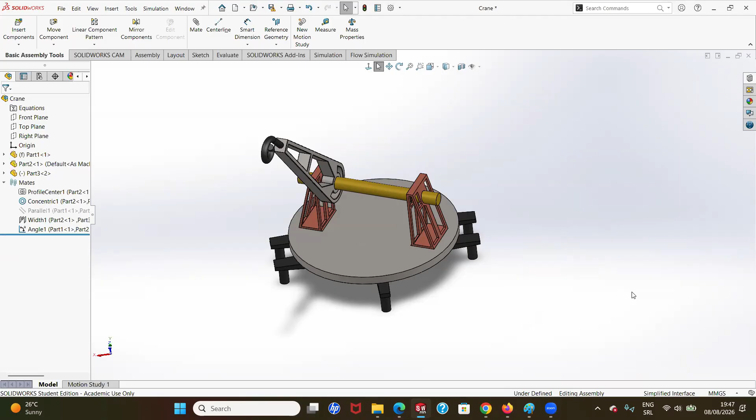In this video, we're going to show two approaches to build this assembly. We're going to show how beginners build this assembly, and then we're going to show how professionals build this assembly. So we have a few parts here. The first part is this one here, support.

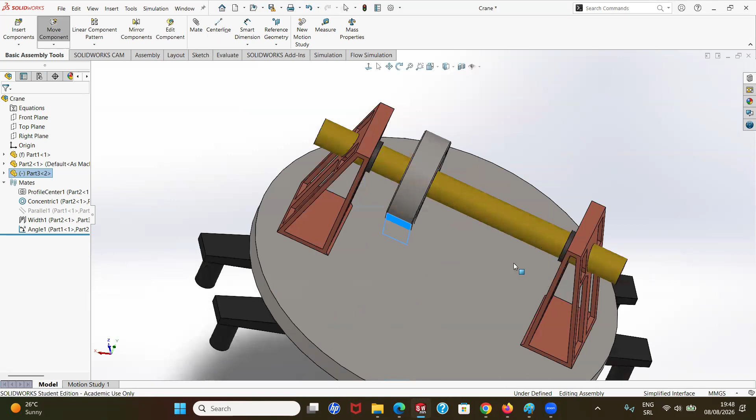Then we have to put this part. This one here, we have to fix this. We have an angle here, 30 degrees. And then we have to put this part here, and this has to rotate. It has to go from this side here to this side here. So let's start and let's show how beginners would build this assembly.

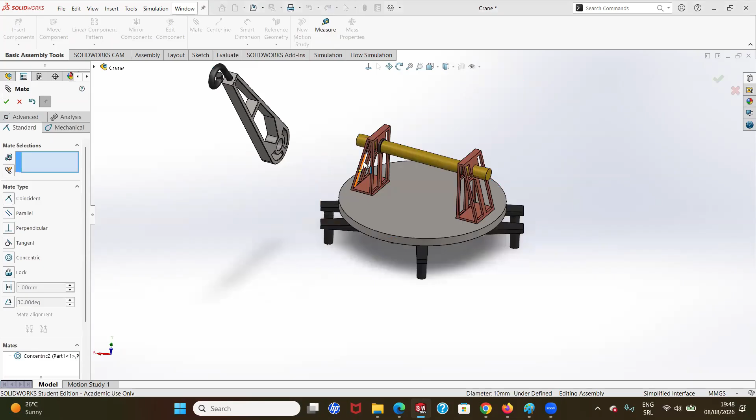So as a beginner, we would go here to the mate, and the first thing that we would do, we would create a concentric mate between this one here and this hole here. Let's click OK. But still, we can move this up and down, right? So then what we would do, we would go here, we would choose this face, and we would choose this face here, and now here we have coincident.

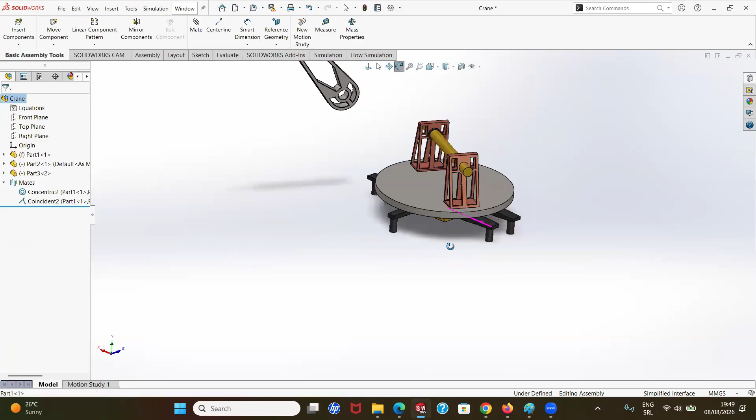So that's the first step. So for now we have two mates, concentric and coincident. The second thing, we would define an angle here between this face and this face here, 30 degrees. So we would go to mate, we would go here, and we would select this face and this face here.

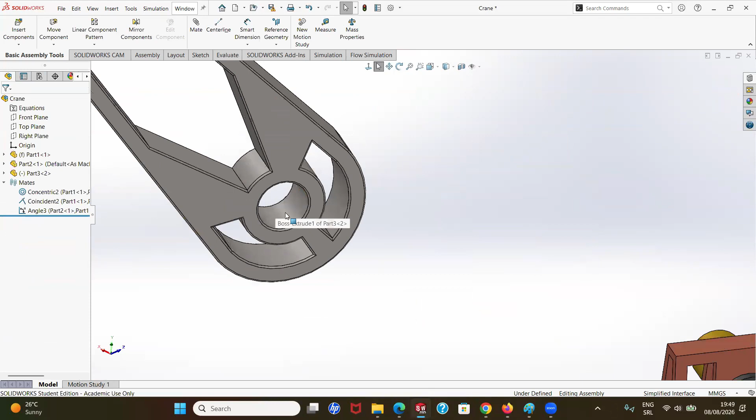Let's click OK. Then the next thing, we would define a concentric relation between this one here and this one here. Let's click OK. So now we have this, but we can move this along this axis. We have to set up limits. So the first limit is this, and the second limit is this one here.

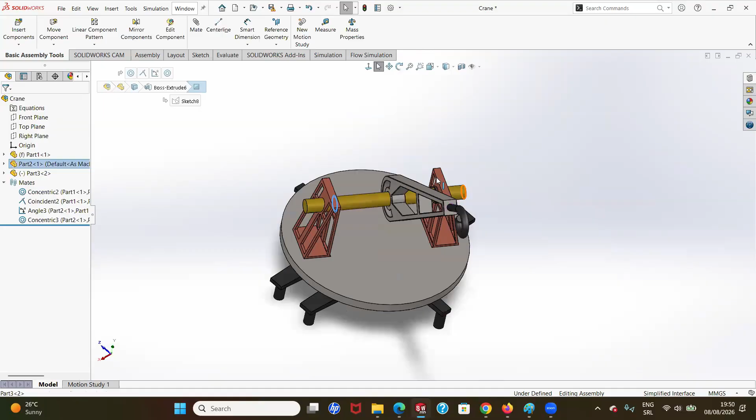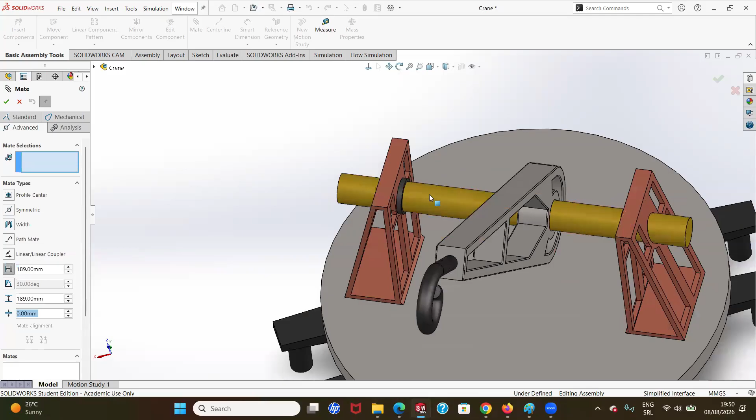So we're going to go here to the mate. Now we have to go here to the advanced mates, and we can go here with length, minimum, which is going to be 0, and maximum 189, like this. So here we have 0, and we're going to select this face, and we're going to select this face here. Let's click OK. Now let's try to slide this. You can see you can go from this limit to this limit here.

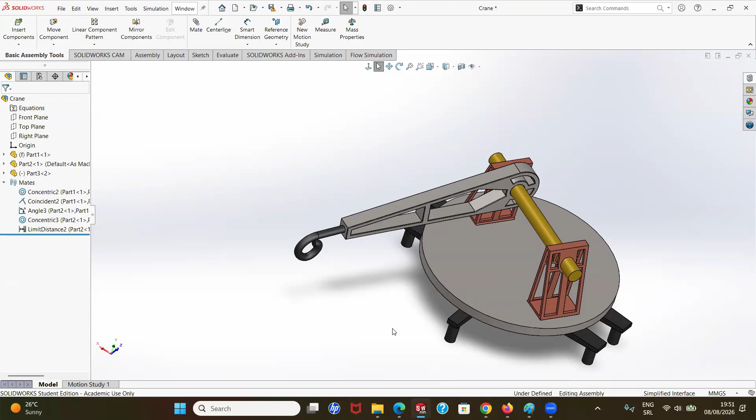Now, this is one way how you can do it, and how most of the beginners would do, but there is a faster way. Some of the mates we're going to use are the same, but we're going to also use two mates that will save you more time and make it much easier for you. Now, the faster way is this. We go here to the mate, and instead of using two mates, coincident and concentric, we're going to go here to the advanced, and we're going to use here profile center.

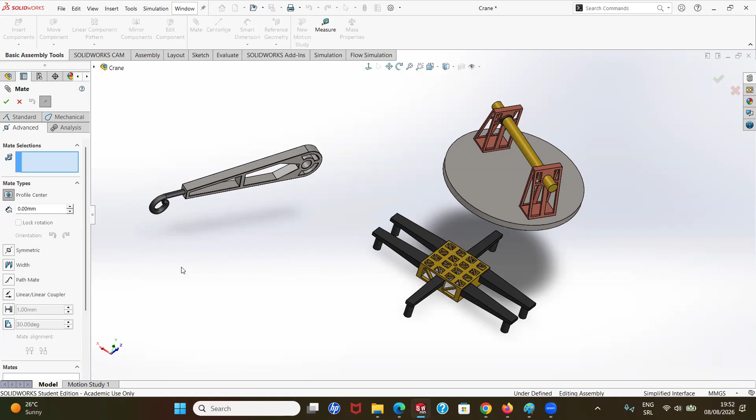So when you have symmetrical parts, you can use this profile center, for example, and we can select this face here, and we can select this face here, and automatically this will be coincident and concentric. So this is profile center. Let's click OK. And now we can rotate this, right?

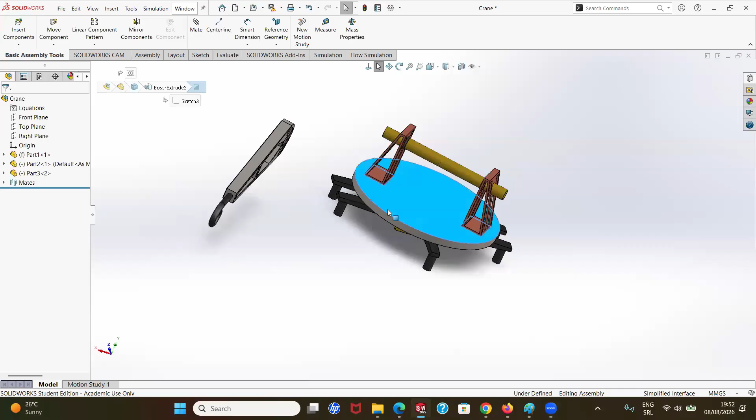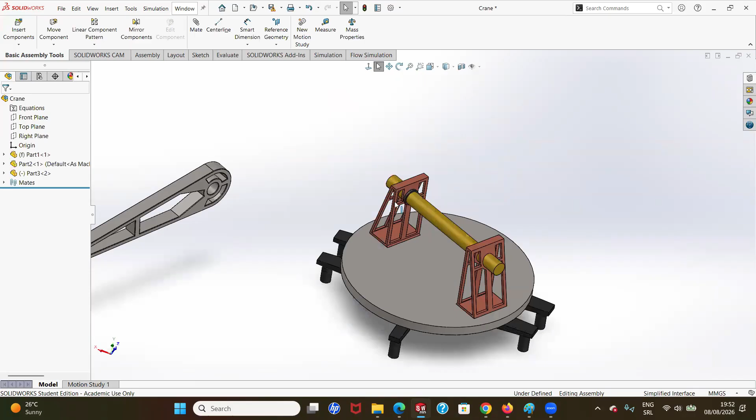Now the second mate is the same. We're going to define an angle here. So we're going to go to the mates, and we're going to go here with an angle. We're going to select this face and this face here. So this is 30 degrees. And also the next mate is the same, which is concentric. So we're going to go to the mate, and we're going to select this one here and this one here. Let's click OK. So we can now move this.

Now we have to put limits. Now we showed the first way how we can put limits. Now the disadvantage of that approach that we showed before is that we have to define values, right? So we have to define a minimum value. We have to define a maximum value. So we have to measure what is the maximum value. So there is a faster way how you can do this.

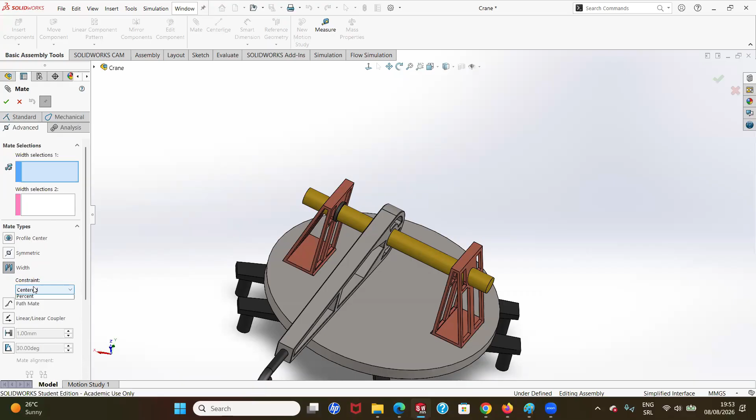So let's go here to the mate. Let's go here to the advanced, and we're going to use here width, okay? And also here for the constraint, we're going to select free. So first we have to define width selection 1, which is going to be this face and this face of this part. Then we have width selection 2, which are our limits, right? It's going to be this face, and it's going to be this face here. And this is it. We can click OK.

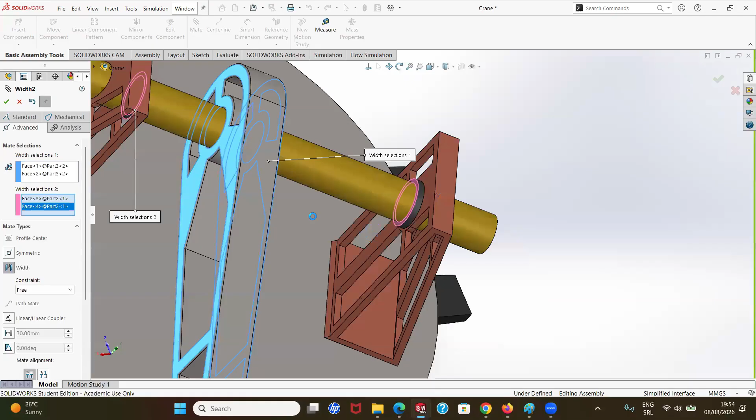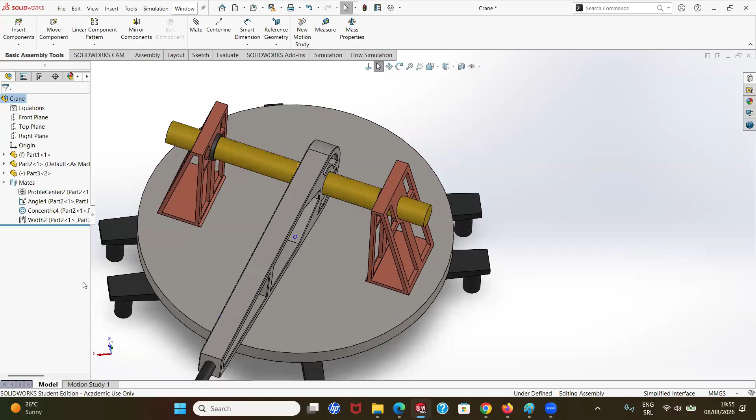And now if we try to move this, we can see we go here from this side to this side here. So this way we don't have to measure what is the maximum distance. And this way you can save a lot of time. Now, when we look at the mates, we only use one mate less, but also we save a bit of time with the width mate. So these are two approaches in this example, how you can put an assembly together in SOLIDWORKS.